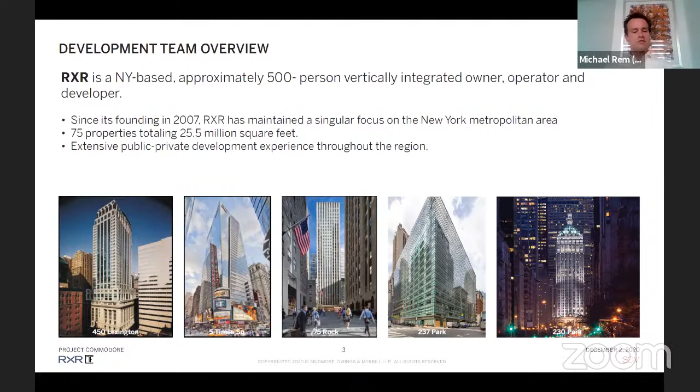Jon, do you want to take a second to introduce yourself and TF Cornerstone? Yeah, so I'm Jon McMillan with TF Cornerstone, and we are a large but private family-owned company. We've been around for 50 years. We have a very long-term, multi-generational investment horizon—we call that sort of patient capital. Our bread and butter seems to be very large-scale public-private sector partnerships.

We don't have a large presence in Community Board 5. I would say the nearest thing to you guys was a rezoning that we did with Board 4, way west on 57th Street over at the highway. And that was probably the first rezoning that came through in the de Blasio administration.

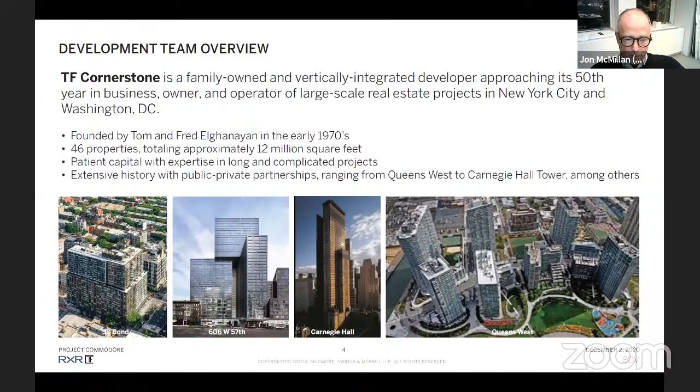So you're probably familiar with this site, but just as a reminder, the site is at the current Grand Hyatt, and it's bounded by Lexington Avenue to the east, 42nd Street to the south, the Park Avenue Viaduct to the west, and our neighbor to the north is Grand Central Market.

The interesting thing about this site is the 4/5/6 subway line that runs diagonally below it. This is of such tremendous importance that it's been a major factor in almost all the decision-making on this project, from the improvements to the transit system, to the location of the public open space, and of course the architecture, engineering, and construction of the building itself.

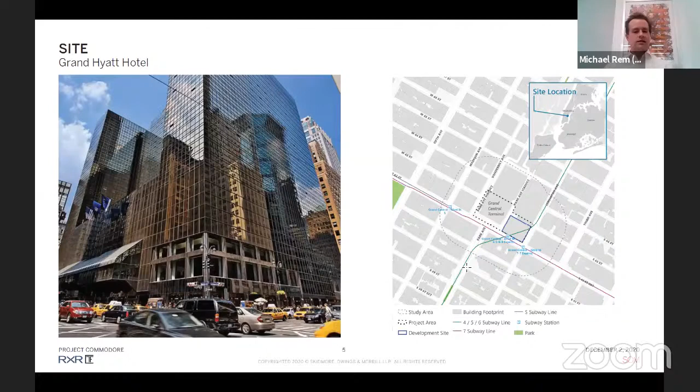On the next slide, we'll take a closer look at the existing conditions, and we notice that the public realm and pedestrian experience in the vicinity of this project really leave plenty of room for improvement and lessons learned. So we're happy to report that we plan on demolishing Donald Trump's first foray into Manhattan real estate and building a new tower from scratch.

Here are some of the characteristics that we'll try to improve. Everyone knows how crowded these sidewalks are and how busy the subway entrances can become. On 42nd Street, that cantilevered restaurant has an imposing presence that blocks views of Grand Central Terminal beyond. And the entrances from Lexington to the subway and Grand Central Terminal are sometimes hard to locate for visitors, and then they spill directly out onto the sidewalk.

So we see all these as an opportunity to right these wrongs.

One thing I'd point out, which you can see in these pictures, characteristic of its site and relationship to the terminal, is that it's continuous on the ground level. So we are a continuation of the terminal across the ground level, but on the second level it pulls away, and we have the space between the terminal and our building at the viaduct. That very much influences how we treat the ground level and the second level, and how we deal with public circulation and open space, which you'll see later.

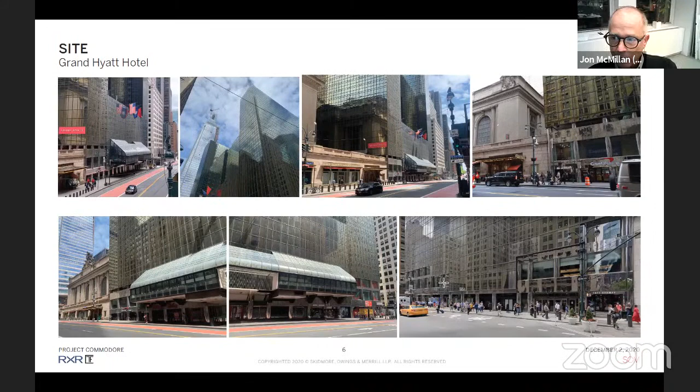On the next slide, you'll see the redevelopment of this project really reflects the heart and soul of the ideals expressed during the rezoning process. We really want to give the community board a lot of credit. You spent an enormous amount of effort getting Greater East Midtown right, and we've taken these ideals to heart with a particular focus on integrating development with our transit improvements and public open space.

You had the foresight to realize the importance of new high quality office space in Midtown, which is even more important in the age of COVID, because most companies move their offices from time to time. And when they move, they'll look for the best available option. We want that option to be in East Midtown.

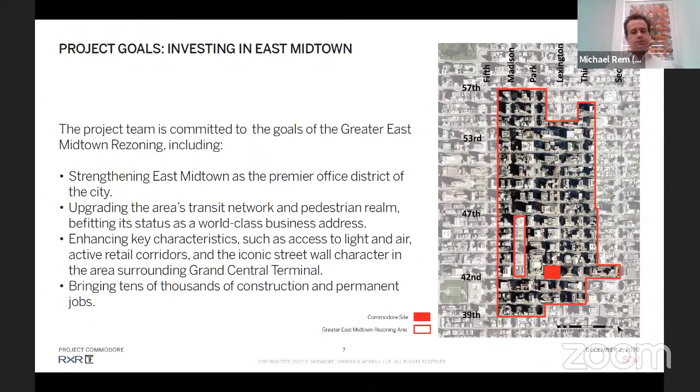Another guiding principle for us has been to improve the streetscape and the transit experience. This is really the focus of what Jon will speak about, but I thought this was an interesting graphic that expresses how we've embraced that connectivity with the terminal and the surrounding neighborhood.

You'll see this intense connectivity on 4 different levels: above grade in the new public open spaces, at grade with new sight lines and improved sidewalks, one level below grade with better access to the subway, and even further underground with a new connection between commuter rail lines and the subway.

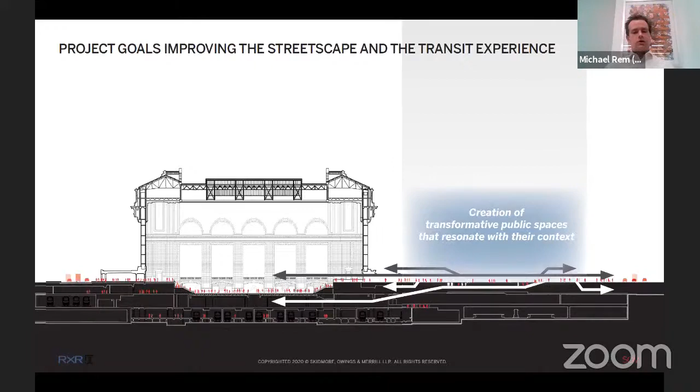The project itself is about 2.2 million zoning square feet, of which about 1.9 million will be devoted to office space, with most of the balance devoted to a new 500-room hotel. There will be about 12,000 square feet of retail on the project, including the MTA-controlled retail within Grand Central Terminal itself. There will also be significant public realm improvements, including subway and mass transit improvements and publicly accessible open space, to an extent that far exceeds the 10,000 square feet required by zoning.

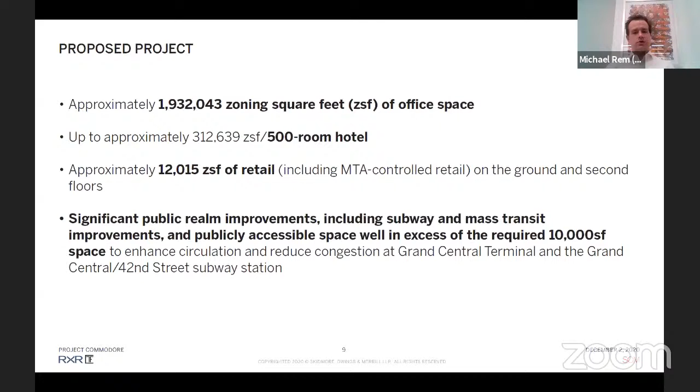On the next slide, in seeking land use approvals for this project, we're really drawing on that framework that was established during the Greater East Midtown rezoning process.

So briefly, we're going to use the transit improvement and public concourse special permits that you're already familiar with, but alter how we access them. In Lot 30, the current Grand Hyatt, and Grand Central Terminal will act as a single qualifying site, and we'll make modifications to the floor area, height and setback, street wall continuity, and other district plan elements, as well as publicly accessible open space regulations. And of course, we'll seek a special permit for the hotel use too.

We're also making zoning text amendments to those existing special permits I discussed. We're reducing the number of required bicycle parking spaces from 286 to about 100, which we think makes sense given that the building sits on top of one of the biggest transportation hubs in the country.

And lastly, since this will be city-owned property, another land use action will deal with the amendment of that lease and extending the ground lease.

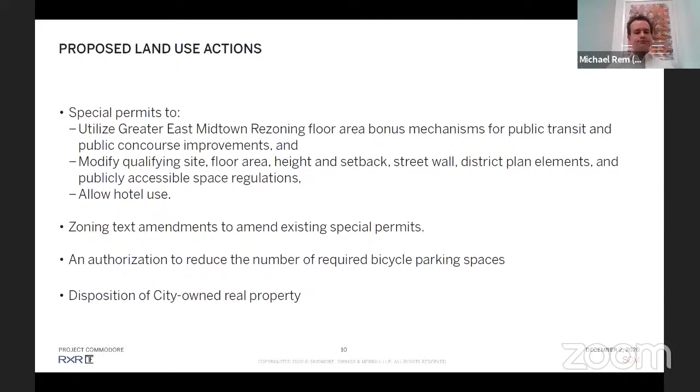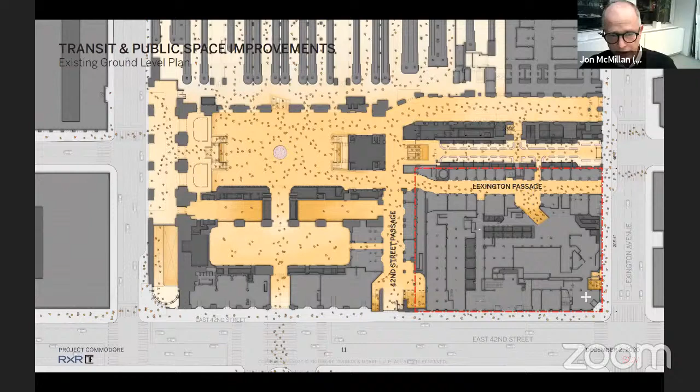Then we've greatly improved the Lexington Passage by nearly doubling its height. Otherwise, it will be located more or less where it is today. We've also relocated the entrance on Lexington Avenue — we had to, because we're setting our building back 5 feet, so we couldn't leave the existing subway entrance where it is. We took advantage of that opportunity and relocated it in a way that aligns with the station below. As Michael mentioned, the subway station is at a 45-degree angle with this building, so now this entrance will bring you down into the station directly in alignment with the station below.

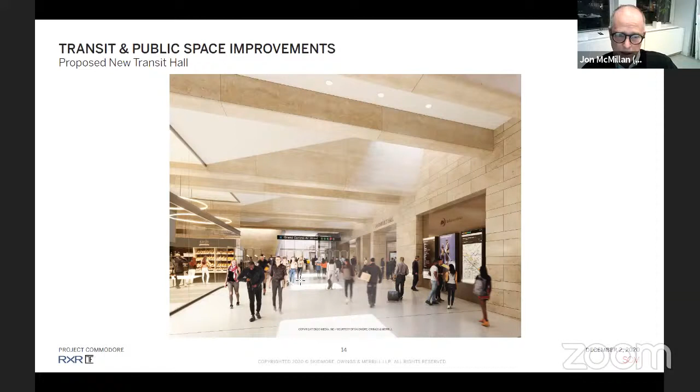If we go to the next slide, you can see that we've been able to create skylights into this transit hall that create strategically positioned views of the eastern facade of Grand Central Terminal. And then again, the openings into this transit hall are aligned with things like the ramp that take you down to the Oyster Bar or to the Vanderbilt Hall, which you can see through here.

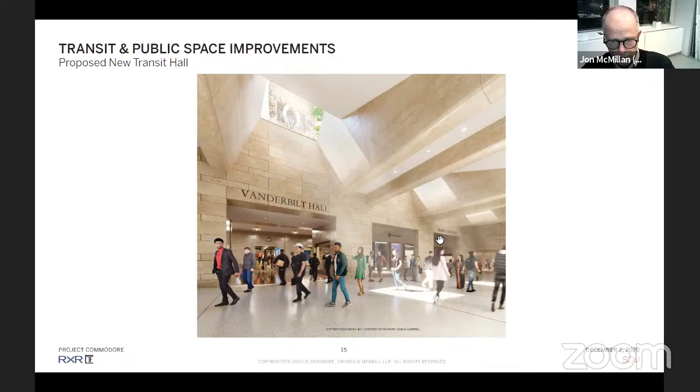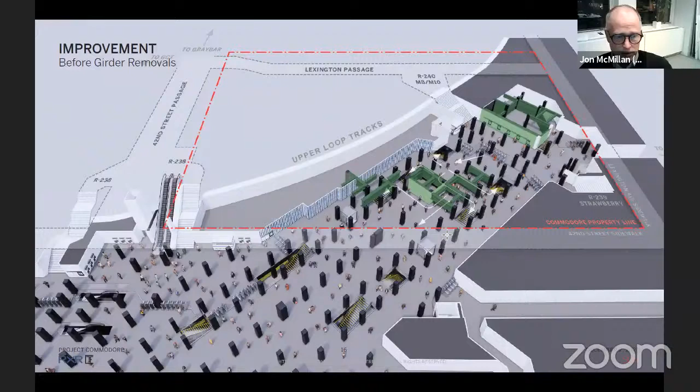There are only two places along the south side of this building on 42nd Street where we can bring structure through the terminal without affecting the subway station. The other one is over at the corner on Lexington Avenue.

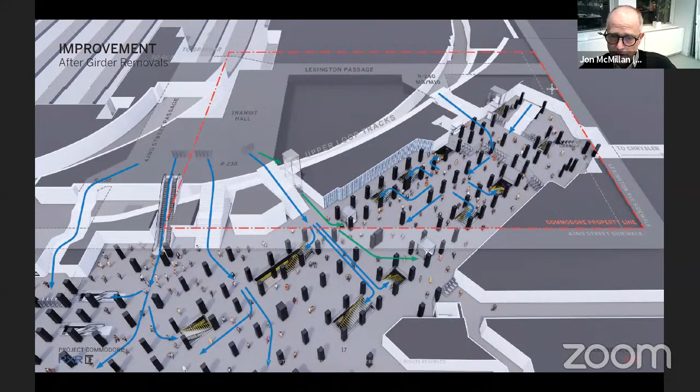Okay, I think that's everything on this slide.

So this is one of those office buildings where the office lobby has to be on the second floor. Because of all this transit stuff going on the first floor, we are not able to bring the elevator pits below grade, so the entire lobby is up on the second level. We expect approximately half of the building's tenants will use this elevator bank, and the other half will use the front door on 42nd Street.

And then you're just starting to get sort of peeks of the public realm that we're going to be proposing above here. We'll talk a little bit more about that later, but it does kind of circle the building in 360 degrees on a couple of levels.

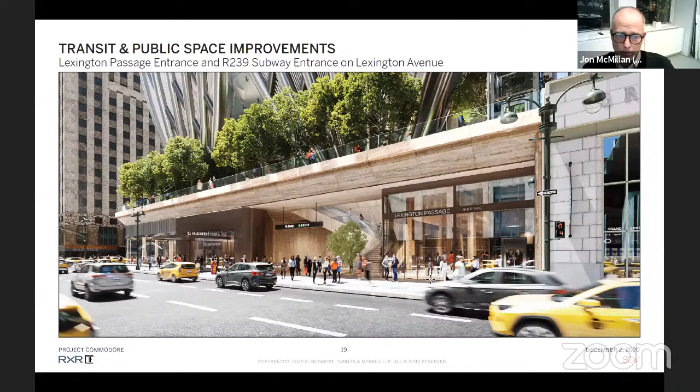And Jon, we should also mention the sidewalk widening here on Lexington. The sidewalk on Lexington has been expanded by, I think, 5 feet. You can also see there's a waiting area for the ADA elevator, and it's a protected waiting area for the ADA elevator taking you downstairs.

And then, by the way, to the left of that was the entrance to the hotel. The Grand Hyatt is going to be rebuilt, and we will be putting that at the very top of the building, and it will be the highest hotel in the Western Hemisphere.

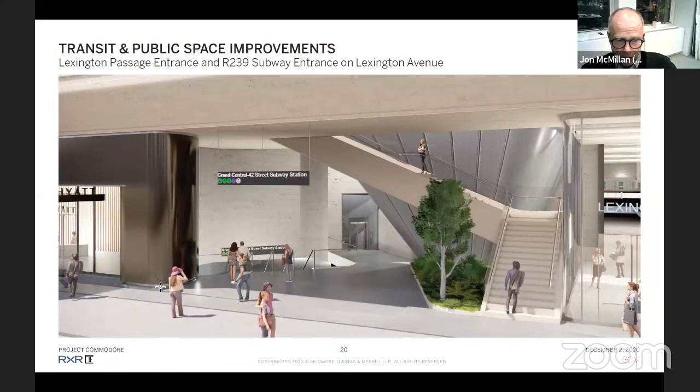So this is kind of an expanded view of all of this, and our last major transit improvement. We've wandered way off the site and found a way to make a connection to the East Side access all the way over at 1 Vanderbilt, and also to the Metro North commuter lines coming in.

So what we have been able to do is find a way to bring those commuters underneath the terminal and through to the 4, 5, 6 mezzanine level, so that those commuters don't have to go up through the terminal and then back down through the individual subway entrances.

And the way we've been able to do that is we've taken advantage of an old turnaround track for Metro North—that's the curved thing—and some underutilized space running under the terminal, under the Grand Central Terminal itself. So both of those come through, connect, and then come through to the mezzanine level of the 4, 5, 6 train.

This takes approximately 4,000 commuters out per hour during peak rush hour, just from the 42nd Street subway entrance, because they're not having to go up through the terminal and then down through that station. They're able to make a direct link underneath. You can also see how the other subway entrance from Lexington is coming in, which has opened up new staircases that are currently hidden and inaccessible. The two gray shapes along 42nd Street are the structural landings for the site, showing how little area we have to bring the structure down.

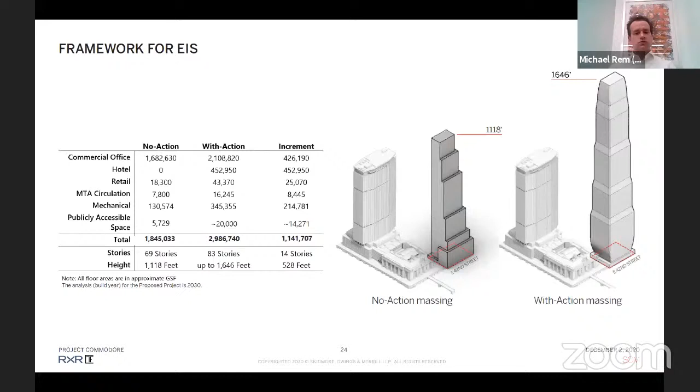You can watch or participate in the meeting using the second web link, which you can also find at the first one. And of course, we'll return shortly to present the building design, and we'll do that in connection with an application we'll be making to the Landmarks Preservation Commission, seeking a report on the harmonious relationship between our building and Grand Central Terminal.

So with that, I think that concludes our presentation. We're happy to take any questions.

Thank you very much. Very dense proposal that you're bringing to us. Let's go to questions from members of the committee. Dave Achelis, go ahead.

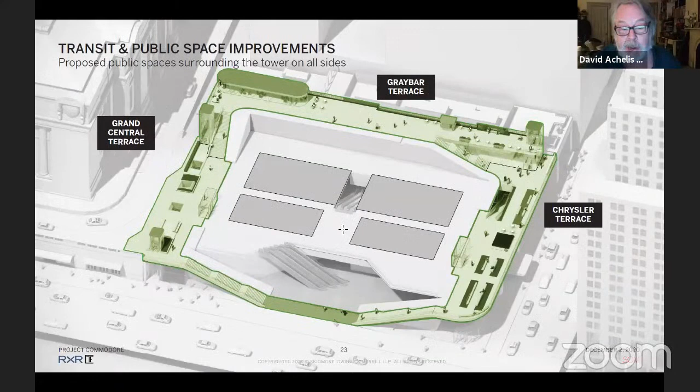If you look at the drawing on page 20, and on pages 18 and 19, those renderings, it looks like the building is expanding out over into the airspace. Is that what's happening there?

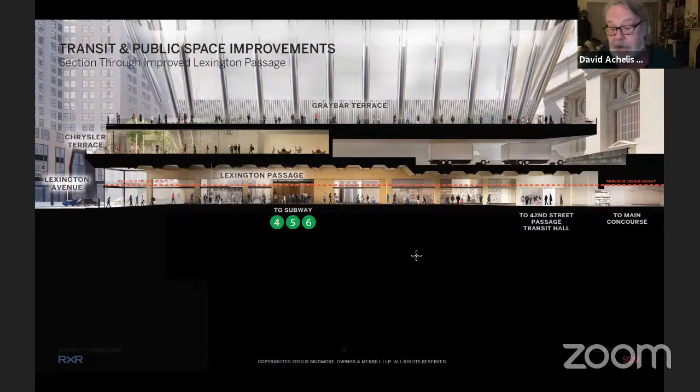That's correct. As I mentioned, the building sets back at these lower levels and expands out as it rises. And that's how we've been able to create these open spaces. Okay, thank you.

And really, in pulling the building in at those edges, at the lower levels, we're able to expand those sight lines of Grand Central Terminal and the Chrysler Building and all these other great landmarks as well.

Just to clarify though, this piece of the red line that you were referring to is not part of the building. That's the extent of the plaza spaces above. The building line would be back along this edge. Okay, thank you. Nick, next question.

Thank you, Layla. At the very beginning of the presentation, Michael, I think I heard you say something about reducing the number of required bicycle spaces. Did I hear that correctly? Can you explain that? Yes.

You did hear that correctly. This building is quite large, and the way zoning works, it requires a specific number of bike parking spots per gross square foot of the building. When you get to a building of this size and run the math, it turns out you need a little over 200 parking spots for bikes, which takes up a tremendous amount of space. But what we found is that no one really uses it.

We actually have a bunch of other buildings of similar size across New York City, and we found that those all had bike rooms of about 100 spaces. They were well used, but not really at capacity. So we thought reducing the bike parking at this project to about 100 also made sense, considering both that experience and the fact that we're very well serviced by public transportation at this site.

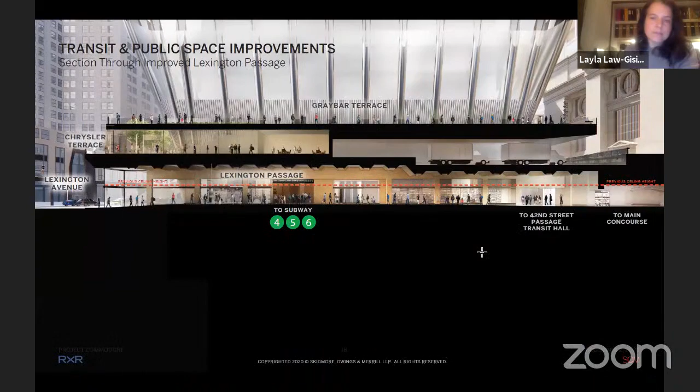Can you clarify again the amount of sidewalk widening that you're proposing? You said 5 feet - does that apply only to Lexington Avenue, or also to 42nd Street? 5 feet on Lexington, and you'll be set back also on 42nd Street, where we are setting back, but the setback is occupied largely by these civic staircases that take you up to the public space on the second level.

And then my final question is, there used to be a street between the terminal and the hotel that has been demapped. Does that become part of your development? I think you're referring to Depew Place, which runs north-south from 45th Street south towards the project site. Right now, didn't it wrap around? Wasn't it a sort of inverted L shape passageway or street that was demapped? It runs north-south essentially, and it's not part of the development site.

Oh yeah, so it does run north-south. Yes, but its lot area is not part of the development site - it is part of the qualifying site. Okay, but you're not developing it. No, it is not being developed. It is being used as it is used today for deliveries and other support services. Okay, so you're just incorporating it into the qualifying site. Correct. Thank you, can I just make one point?

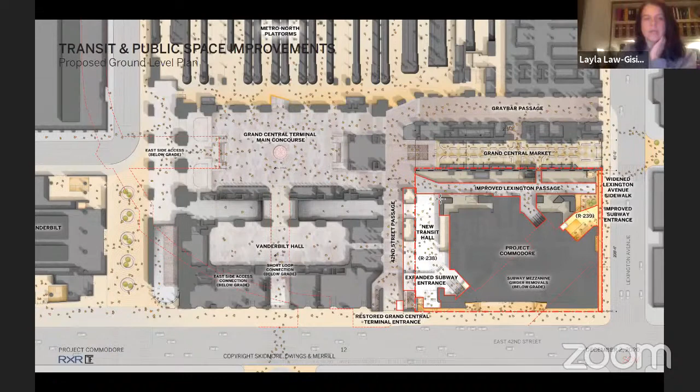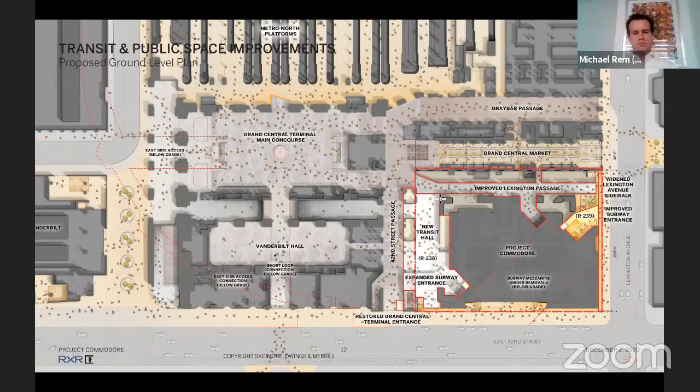The loading and servicing for this building, which we didn't mention, will continue to take place off that Depew alley, which is what the Grand Hyatt Hotel uses today. So that will remain unchanged, and you will never see the servicing for this building because it's tucked away in that back alley.

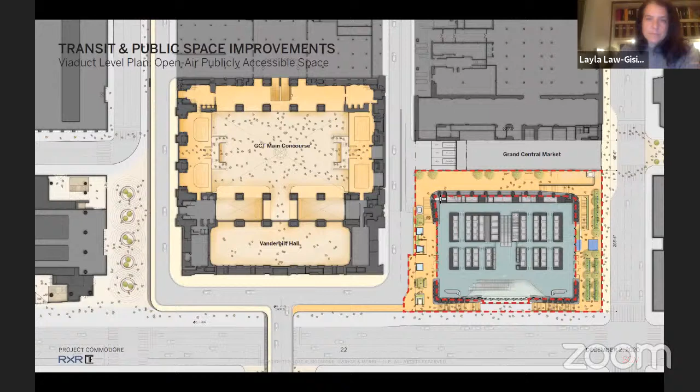Hi, I saw there was a lot about the 456 mezzanine. Is there any plans for the 7 train and connections to the 7 train?

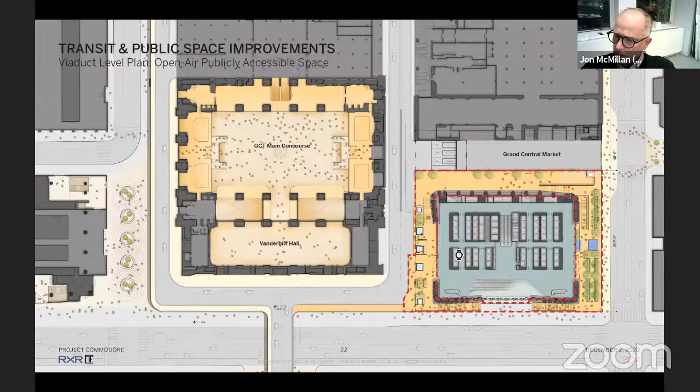Okay, thank you. And will that second phase then meet all the qualifications for the Hudson Yards mitigation that was cited during the environmental impact of Hudson Yards, that there should be more access from Grand Central Terminal to the 7 train? I can't answer that. Yeah, okay, I'll admit I don't know. All right, but once again, Mike, I think it's very important that we ask that to be studied in the environmental impact statement, and that it becomes part of the proposal.

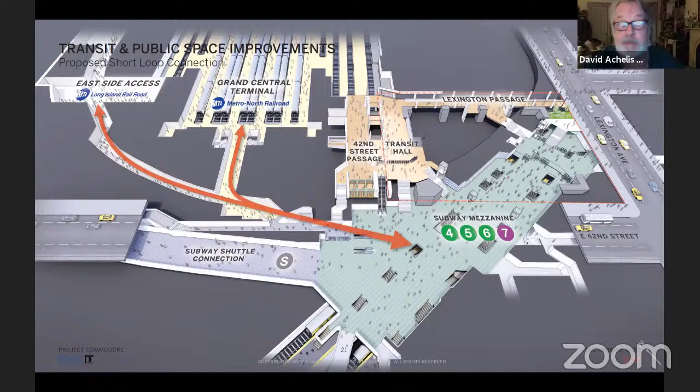The plan as it stands is a great plan. The subway definitely needs work around there. It just seems to me the trade-off for one of the tallest buildings in Manhattan, for providing what the city needs anyhow and what any decent developer would do in the course of events, it seems like a huge trade-off—from 1,100 feet to 1,600 feet—for just doing what any good developer would do with the subway system in this particular case. Thank you.

Other areas of concern in an environmental impact statement are landmarks and other historic resources, the socioeconomic impact, which we touched upon, transit, access to air and light, and parks.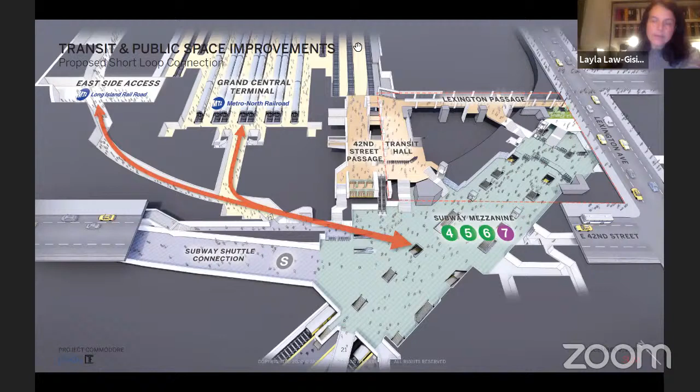So let's touch briefly upon this notion that the open space would not be at grade, but would be elevated and would be encroached upon by restaurants and other commercial structures. Do we want to flag that in the environmental impact statement? The requirement is that in exchange for this development, the developer has to provide 10,000 square feet of publicly accessible space. Currently the space is not at grade. Is it something we want to flag as being of concern and should be evaluated in the EIS? I would say yes.

Okay, any other, do we have consensus on that? I see some heads shaking. Nancy, go ahead. Oh, you're on mute, Nancy. Yeah, accessibility to that second level is really important. So we need to make sure that it's accessible for everyone, including elderly who don't normally climb. How many steps? That's a very long staircase. There needs to be elevators available to the disabled and elderly so that they can enjoy that park space.

Okay, so I think we can put that in the accessibility bucket. EJ? No, I just second that. I think the accessibility should definitely be studied—the number of points of access should be measured, and their capacity per hour, to make sure that it doesn't become like an unreachable sky deck, but that the intended number of pedestrians can actually access it easily, and accessibly, as was mentioned.